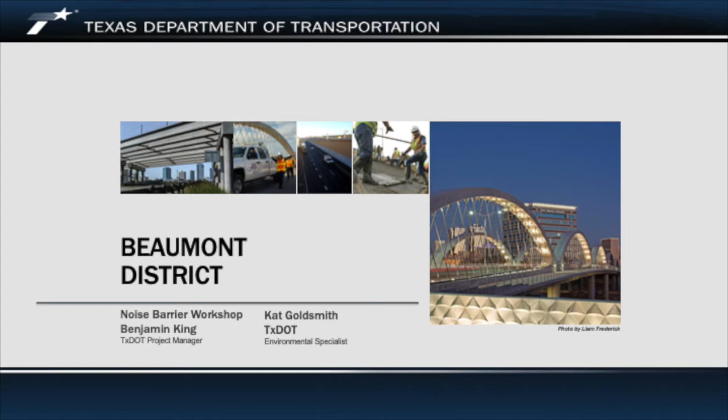I am the TxDOT Public Information Officer for the Pharr District, but I'm serving as your presenter on behalf of the Beaumont District. I will present a brief summary of the proposed IH-10 US 69 interchange project and discuss the project's need and purpose and a description of the proposed noise barrier.

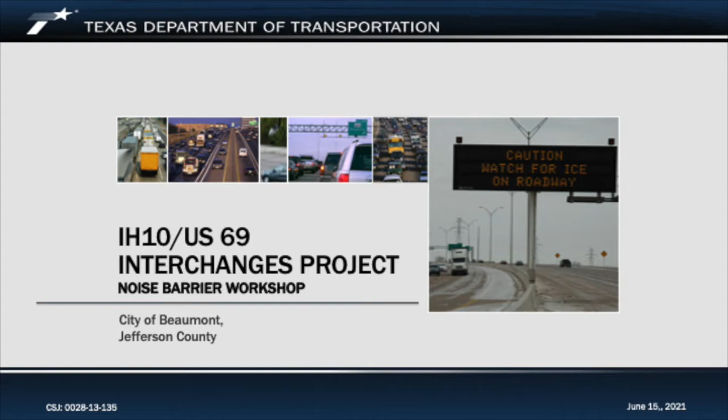We appreciate your interest in this noise barrier workshop and welcome you. The purpose of this workshop is to inform you about a noise barrier recommended near your neighborhood and to solicit your viewpoint as a resident adjacent to or benefiting from the proposed barrier.

To begin, I would like to talk a little bit about the project. TxDOT and the Federal Highway Administration propose to reconstruct and expand IH-10 and US 69 where they converge in the city of Beaumont in Jefferson County. The proposed project would widen the existing I-10 from Hollywood Overpass east to 7th Street.

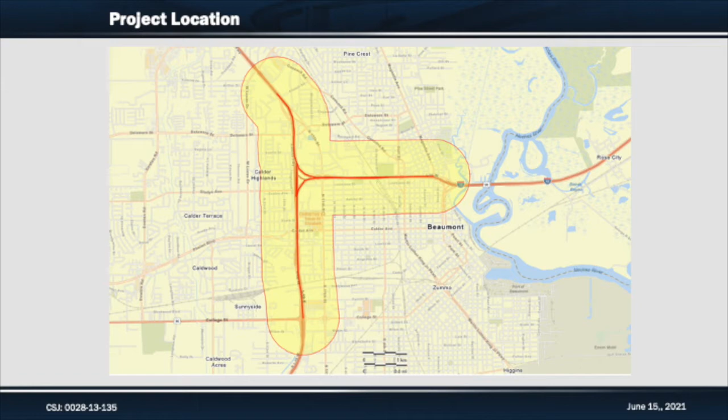What is our goal for today? First, to provide you with a general overview of our traffic noise analysis and criteria used to develop our preliminary noise barrier recommendation. Next, to explain your role in making your voice be heard. After learning about the proposed noise barrier, you'll be invited to cast a vote for or against it.

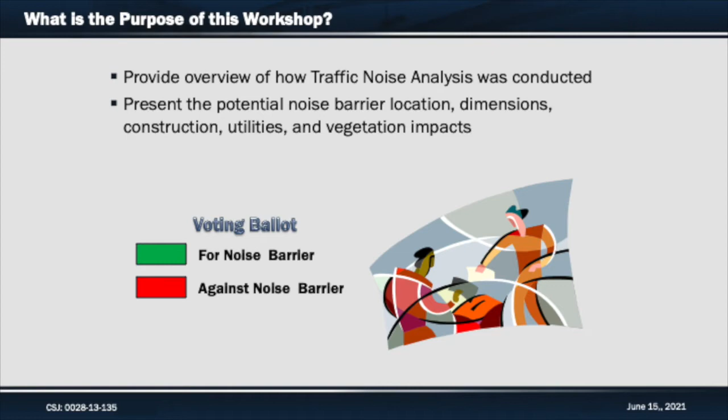Details regarding the aesthetic and landscape design elements as they pertain to the noise barrier are part of this presentation. We want to provide you with all the details necessary to make an informed decision in order to vote for or against the proposed noise barrier.

I will start out with some general information regarding sound and noise. Then I will describe how the traffic noise analysis and abatement process was conducted for this project. Then I'll describe the proposed noise barriers.

The purpose of the project is to alleviate congestion, to provide a more reliable transportation and evacuation route, to enhance connectivity and mobility, and to address safety. The two I-10 interchanges with US 69 in Beaumont are a critical part of the strategic freight network and hurricane evacuation capacity in southeast Texas.

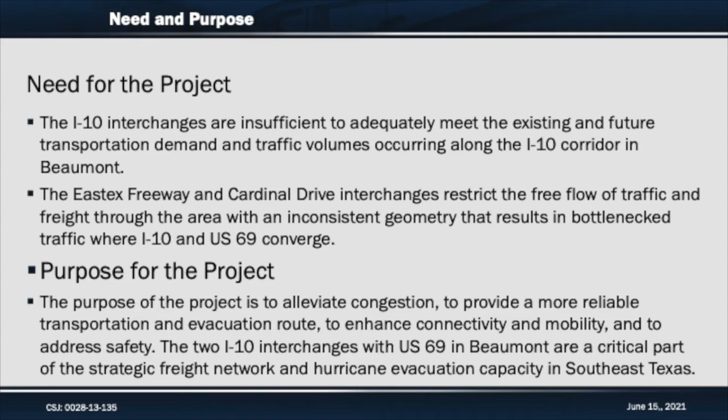This slide shows where the proposed noise barrier 2 would be located. Barrier 2 would also be constructed in 4 segments between Austin Street to about 0.13 miles south of Kenwood Drive. It will allow for movement of traffic in and out of the 3 single-family driveways along this portion of the highway.

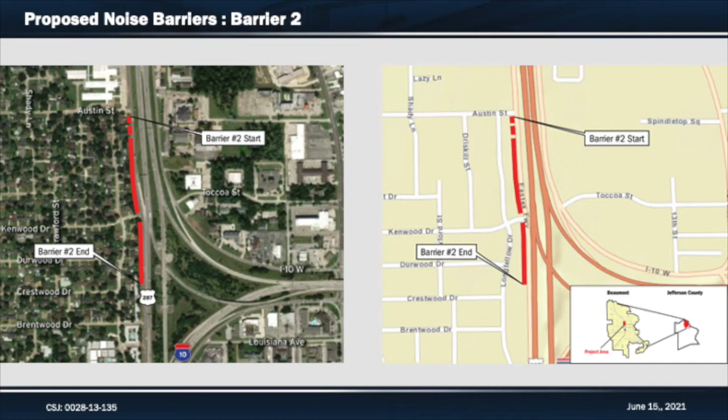Let us discuss some general information regarding sound and noise. Then I will describe how the traffic noise analysis and abatement process was conducted for the project. We will also talk about the proposed noise barriers.

Cars and trucks generate noise. This traffic noise is produced by the movement of engines, the vibration of exhaust systems, and the friction of tires against the roadway. The loudness of noise from traffic depends on the road surface type, the amount of traffic, how fast the traffic is moving, and the number and type of vehicles traveling on the road.

For example, 18-wheeler trucks with their bigger engines and many tires produce more sound than the typical 4-door passenger car. In general, the more traffic on the road and the faster the traffic is moving, the louder it will be for a person near the road.

Additionally, if you are within the line of sight of a highway, it is going to be louder than if you cannot directly see the road, because sound is loudest when it travels in a straight path.

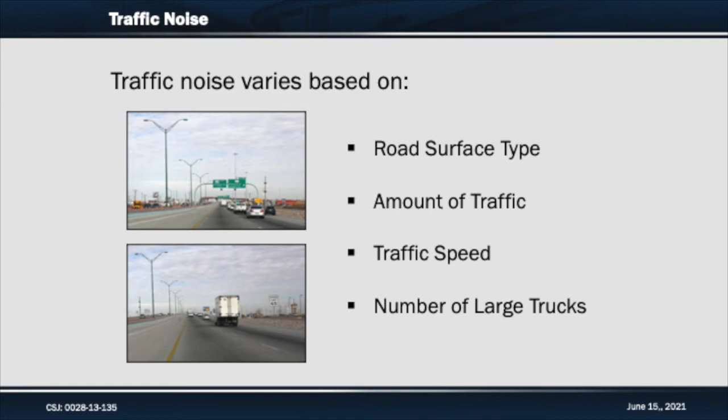Sound waves move outward from a source in all directions. When there are no objects in between the source and your ear, noise will travel in a direct path. However, sound can be reduced by placing a solid object or barrier, such as a wall, in between the source and the receiver. The location and height of a barrier can affect the amount of noise that is reduced.

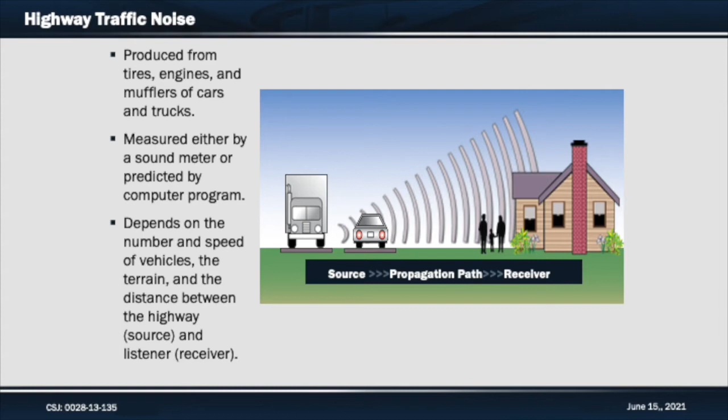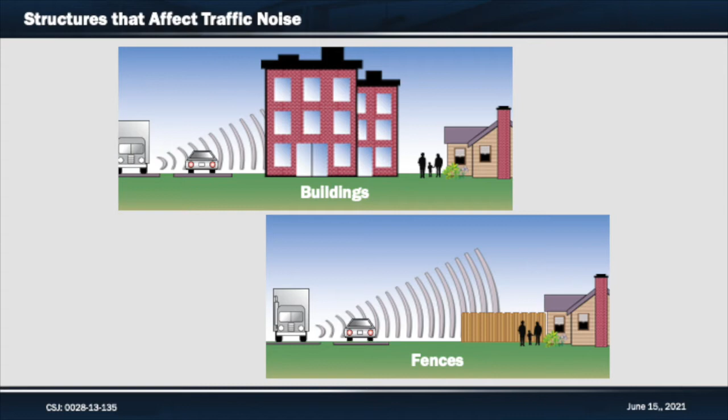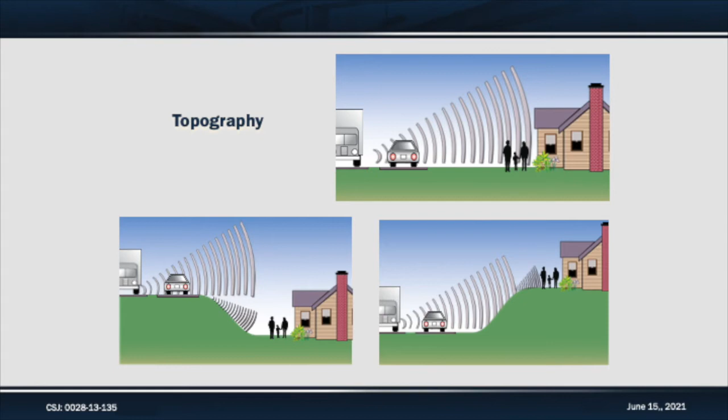Highway traffic noise is often blocked by buildings. Tall fences can reduce sound levels, but no barrier can completely block all traffic noise. Topography also affects highway traffic noise levels. When the highway is either higher or lower than the receiver, overall noise levels are reduced, since in both cases the sound waves have a longer path to travel.

So how does TxDOT evaluate traffic noise and noise abatement for highway projects? The Federal Highway Administration, or FHWA, requires that we conduct noise studies when federal funds are utilized and when adding capacity on existing highways which may have an increased effect on noise.

The purpose of our noise study is to investigate the impact that the I-10 US 69 Interchanges project has on the nearby outdoor areas frequently used by people. The noise analysis for this project was performed in accordance with TxDOT's Guidelines for Analysis and Abatement of Roadway Traffic Noise and Reasonable Cost Proposal for 2018 Noise Policy. The TxDOT guidelines have been approved by the FHWA.

The Federal Highway Traffic Noise Modeling Software, known as Traffic Noise Model or TNM, was used to calculate the existing and predicted future traffic noise levels along the roadway project.

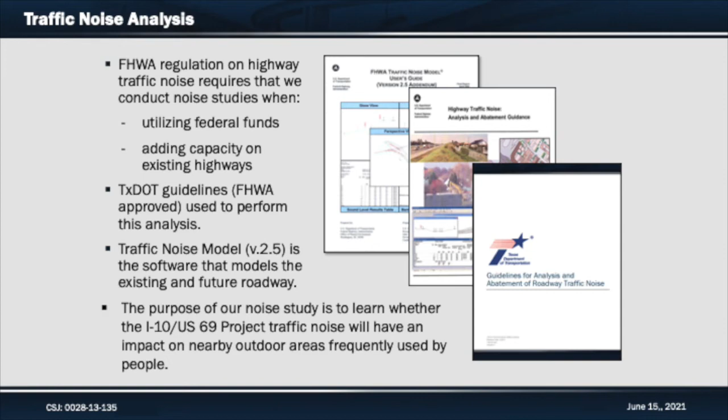A traffic noise analysis is a multi-step process. A noise workshop is usually one of the last steps in this process before the final engineering plans are approved and the project is constructed.

The noise analysis process includes identifying noise receivers, modeling noise levels, identifying potential noise impacts, considering abatement for noise impacts, and finally, talking to the benefited residents and owners adjacent to the road about the results of the noise analysis and soliciting the vote of property owners at a noise workshop.

The purpose of a noise analysis is to determine whether traffic sounds from a highway will have an impact on nearby outdoor areas frequently used by people. These areas are called receiver locations or receivers. Some examples of receivers include residential backyards, playgrounds, and schools.

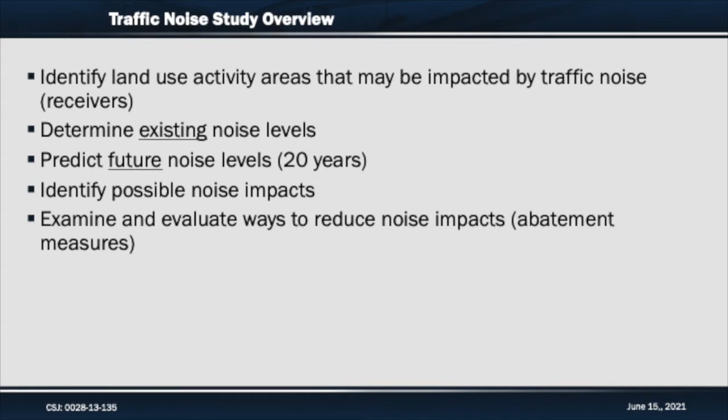After identifying receivers, a noise analyst determines existing and future noise levels at these locations. Then, based on the predicted noise levels and criteria, the noise analyst identifies possible noise impacts and looks at ways to reduce those impacts. The traffic noise analysis is performed by using an approved computer modeling software called Traffic Noise Model version 2.5.

The computer model requires the analyst to enter noise receiver locations, the amount of traffic, and traffic type. Traffic type is the percentage of cars, medium trucks, and heavy trucks. The model also considers how fast the traffic is moving, the roadway design, and surrounding terrain features. Traffic noise is modeled for both the existing traffic and roadway conditions and for future traffic projections and the proposed highway design.

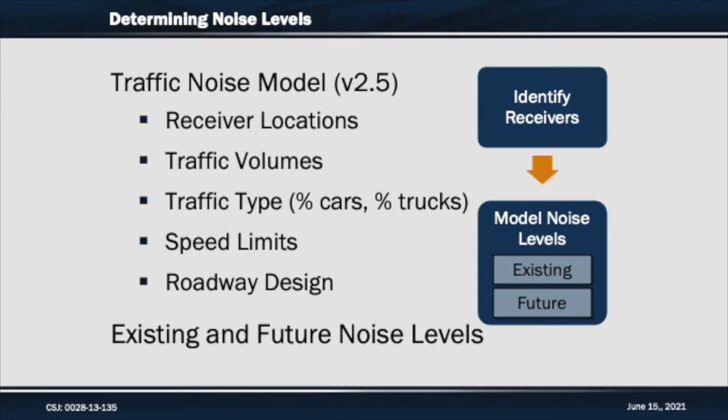So how do we determine if there will be a traffic noise impact? We use noise abatement criteria established by the Federal Highway Administration. The noise abatement criteria, or NAC, for residential land use is 67 decibels. A decibel is a measure of the loudness of sound.

There are two types of noise impacts. An absolute impact is when the predicted noise level at a receiver approaches, equals, or exceeds the noise abatement criteria value. For residential properties, an impact would occur if the predicted noise level is 66 decibels or more. A relative noise impact is when the predicted noise level is substantially higher — this is when the future noise level is more than 10 decibels higher than the existing noise levels.

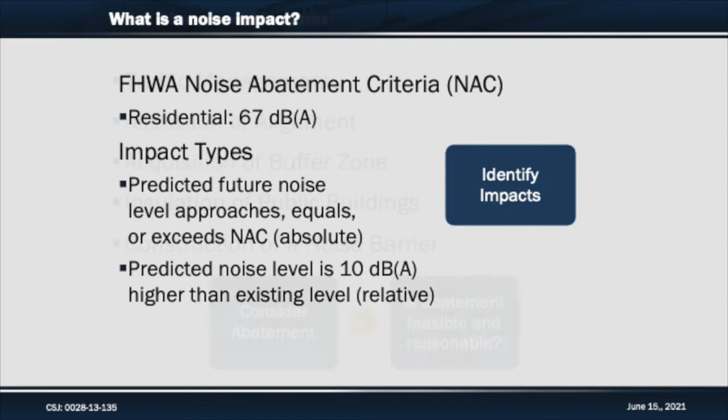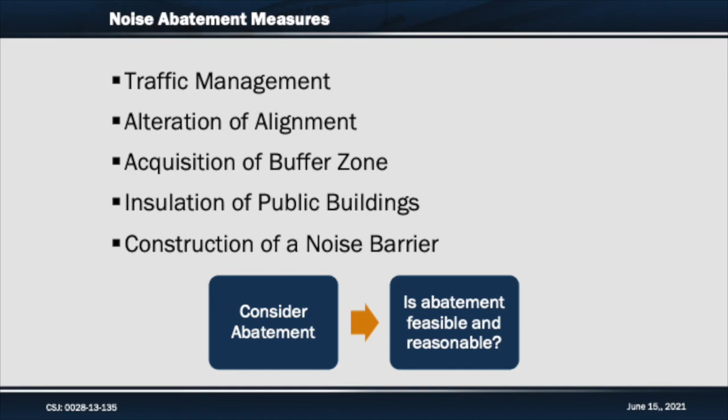If there is a noise impact identified, then the next step is to consider abatement measures. Abatement measures are actions that could lower the noise level. These include traffic management, alteration of alignment, acquisition of buffer zones, insulation of public buildings, and finally, the construction of noise barriers. Construction of noise barriers has been determined to be the best solution for this project.

What is a noise barrier? Noise barriers are solid walls or barriers that are constructed between the highway and people in order to help reduce roadway noise levels. Noise barriers can reduce noise levels, but do not completely block all noise. However, a noise barrier cannot be proposed unless the barrier is determined to be both feasible and reasonable.

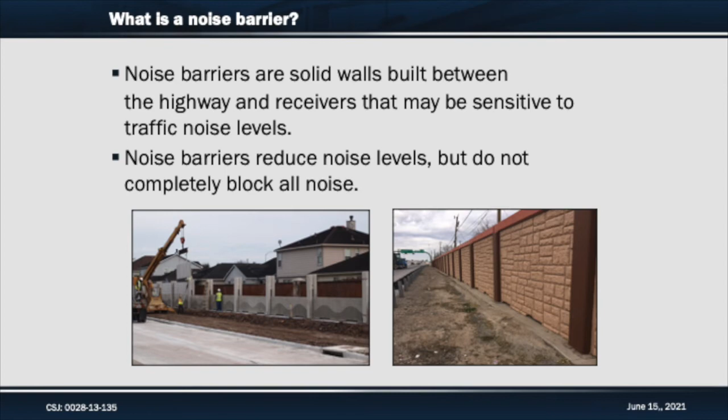What makes an abatement measure feasible? Feasibility first means that a noise barrier can actually be built in a location, given site constraints such as topography, driveway access, drainage, utilities, and maintenance. Feasibility also means that the noise barrier must provide a substantial reduction in noise levels — defined as a reduction of at least 5 decibels for greater than 50% of the first row impacted receivers.

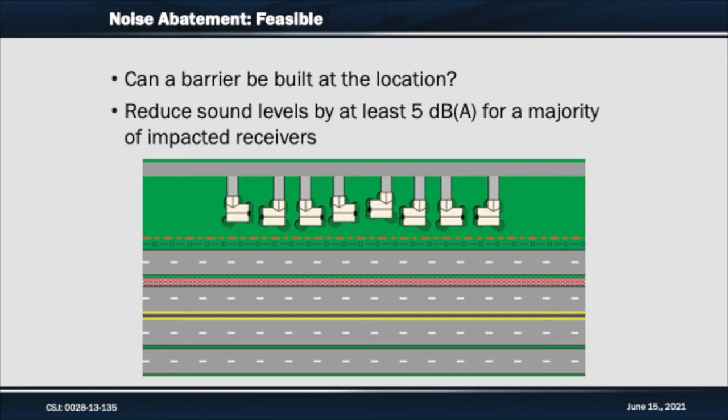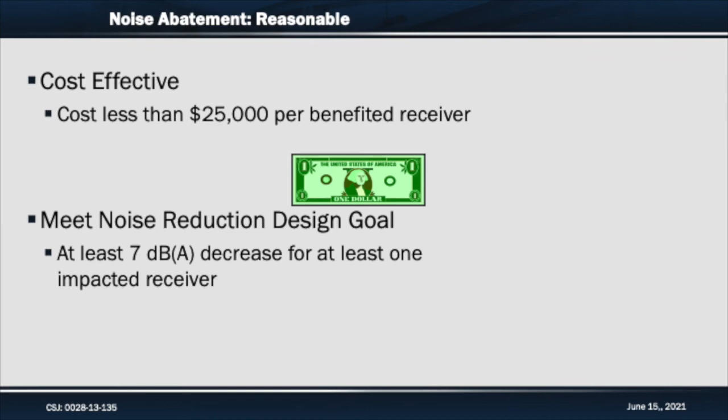The second criteria is that a noise abatement measure should be reasonable. There are two measures of reasonableness. First, the baseline cost of a barrier is $25,000 per benefited receiver. Second, a proposed barrier has to meet a noise reduction design goal to provide a 7 decibel decrease for at least one impacted receiver.

For this project, noise levels would approach, equal, or exceed the level at which the Federal Highway Administration would consider noise abatement. As a result, noise barriers were evaluated at the I-10 and US 69 intersection. It was determined that the construction of noise barriers in 4 locations along I-10 and US 69 could provide feasible and reasonable traffic noise abatement for this project.

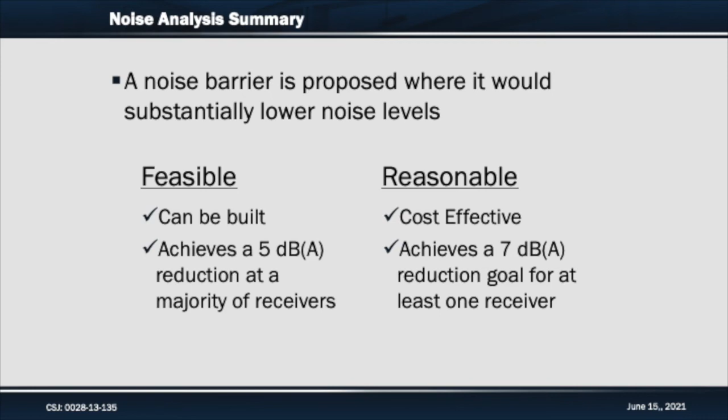In this presentation, we are discussing barriers 1 and 2 along I-10. This slide shows a preliminary layout of Barrier 1. Barrier 1 will be in 4 segments. The entire barrier, including all 4 segments, will be 702 feet in length and 20 feet tall. It would be located on the I-10 frontage road from Gladys Avenue North to about 0.2 miles.

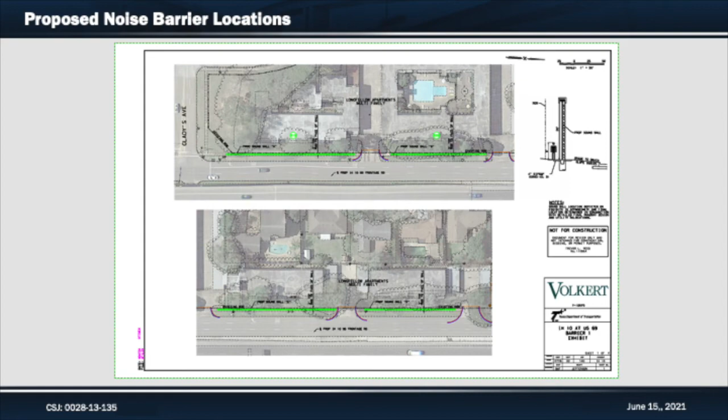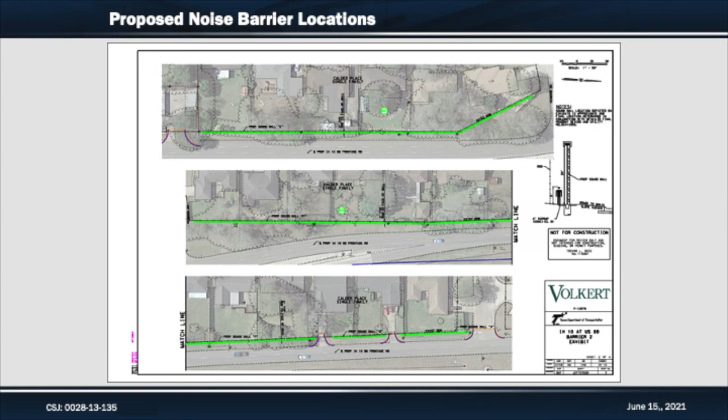This slide shows a preliminary layout of Barrier 2. Barrier 2 will be in 4 segments. The entire barrier, including all 4 segments, will be 1,534 feet in length and 20 feet tall. It would be located on the I-10 frontage road from Austin Street to about 0.13 miles south of Kenwood Drive.

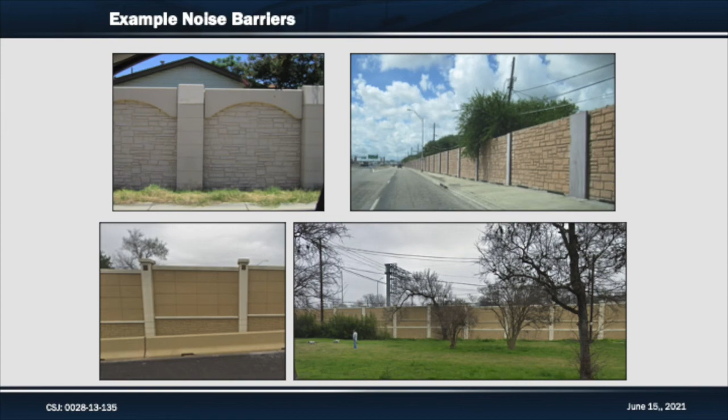To show you what the proposed noise barriers might look like, here are some examples. The top two photos show noise barriers in San Antonio and Corpus Christi. The bottom two photos show noise barriers in Austin.

Noise barriers are intended to provide positive aspects to neighborhoods, but there are some negative impacts that can occur as well. Noise barriers are designed to reduce traffic noise and are normally well received. However, they can also result in restricted views, feelings of confinement, can affect sunlight, and in some instances limit access to nearby streets.

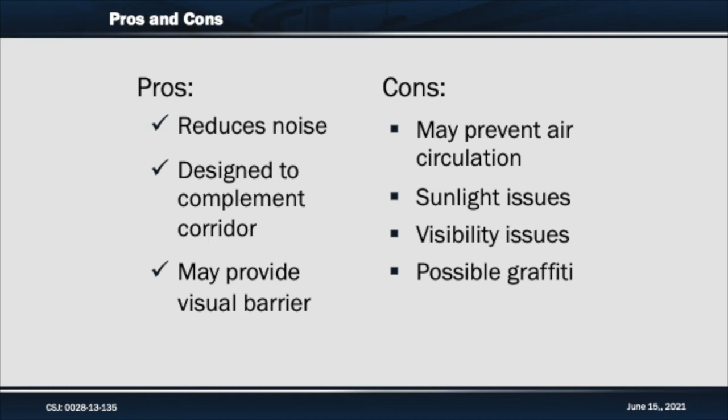Finally, it's important that you know that a noise barrier will not eliminate all noise. There will still be noise, but it would be decreased.

So, who can vote? To be eligible to vote, you must be the owner or resident of a property that touches a right-of-way line near where a barrier is proposed. Only one vote is allowed per property. Some residents that are not directly adjacent to the right-of-way line have also been identified by the noise model. Those persons can also vote.

Not all votes are counted equally. A weighting system is applied based on owner occupancy. For owner-occupied dwelling units, the property owner's response counts as one vote. If multiple ballots are received from multiple owners of the same unit, for instance a husband and wife each submit a ballot, they are collectively counted as one vote.

For non-owner-occupied dwelling units, a response from the resident or renter counts as 10% of the vote, and a response from the owner counts as 90% of the unit's vote.

You may only vote for or against the proposed barrier nearest your property. The decision to construct a particular barrier is based on a simple majority vote. For example, if there are 30 property owners eligible to vote, then a majority is 16 votes.

So, if 16 or more owners vote in favor of the barrier, then the noise barrier will be built for that location. A majority of votes against the barrier would mean that a barrier would not be built at that location. It is important to note that the decision will be based on a majority of votes received. Each proposed barrier is considered separately during the voting process.